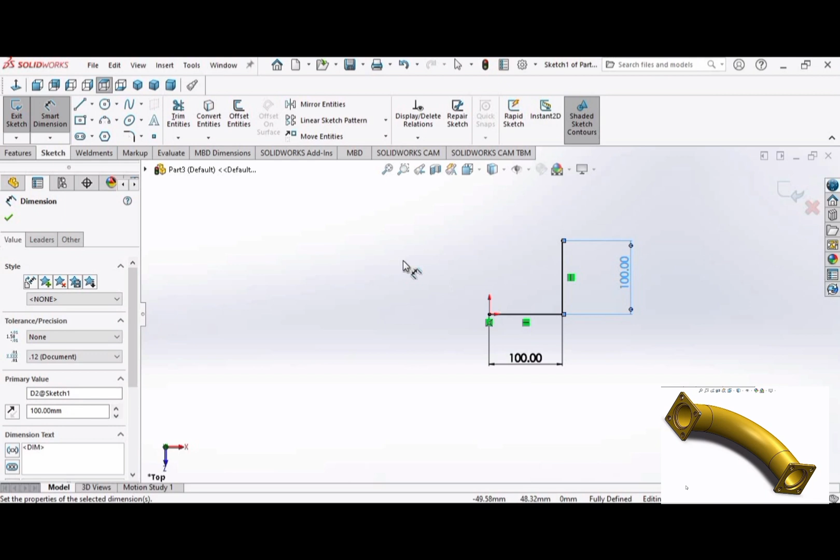Select part and click OK. Select line and make a horizontal line and a vertical line like this. Then go to smart dimension. Make this dimension as 100 millimeter and then make this dimension as 100 millimeter also. Then select the fillet, select these two lines, and then adjust this fillet as 70.

Perfect. Exit the sketch and select plane. Select this line and select this point.

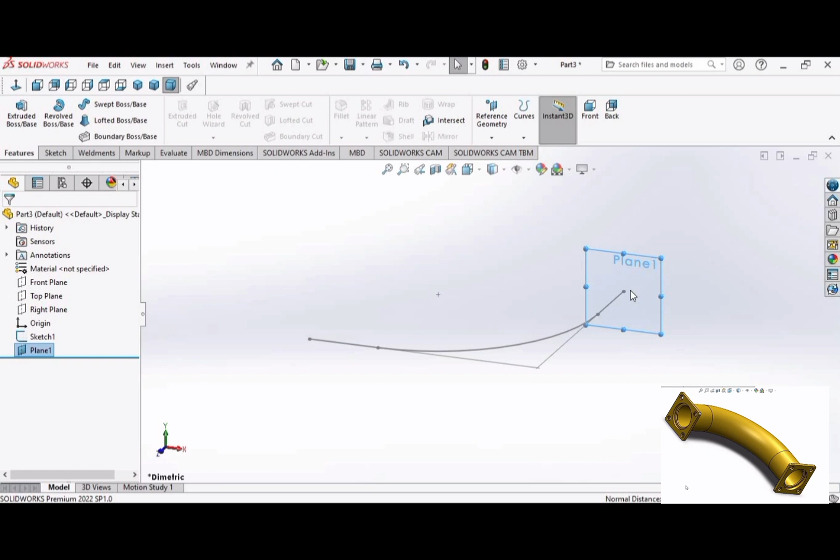Now create a circle at the plane like this and make dimension as 30 millimeter.

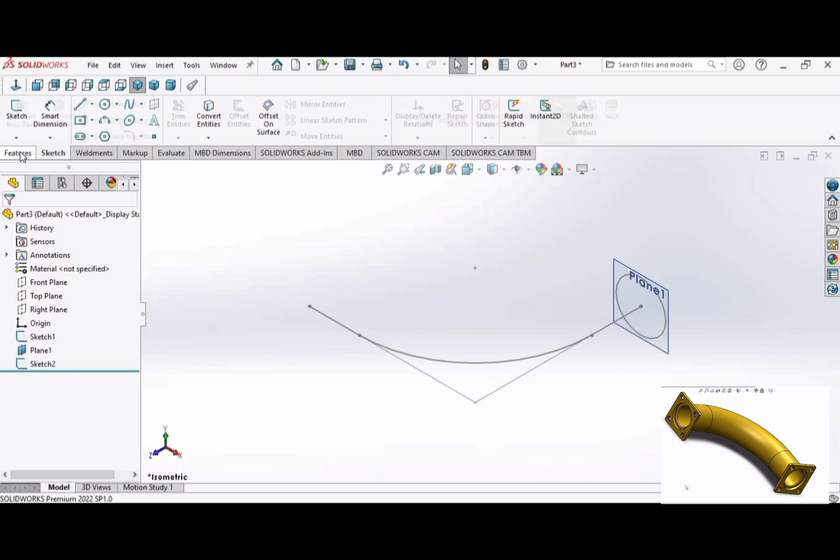Now go to the features and select Swept Boss command. Here we have Swept Boss. At first select this circle, and then select the line, this line.

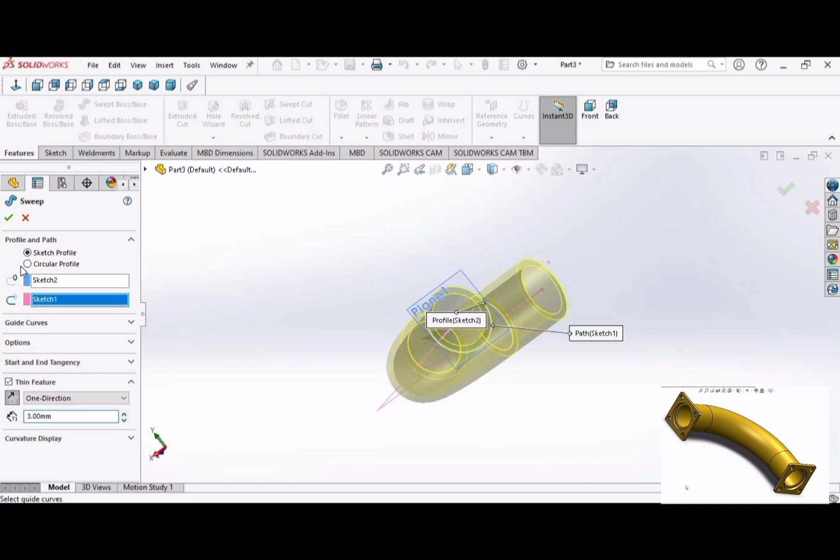Now select the thin features, select this option and make the thickness as 3 millimeter. Now hide this plane.

Select this surface and sketch. Make a rectangle like this. Dimension as 40 millimeter each side.

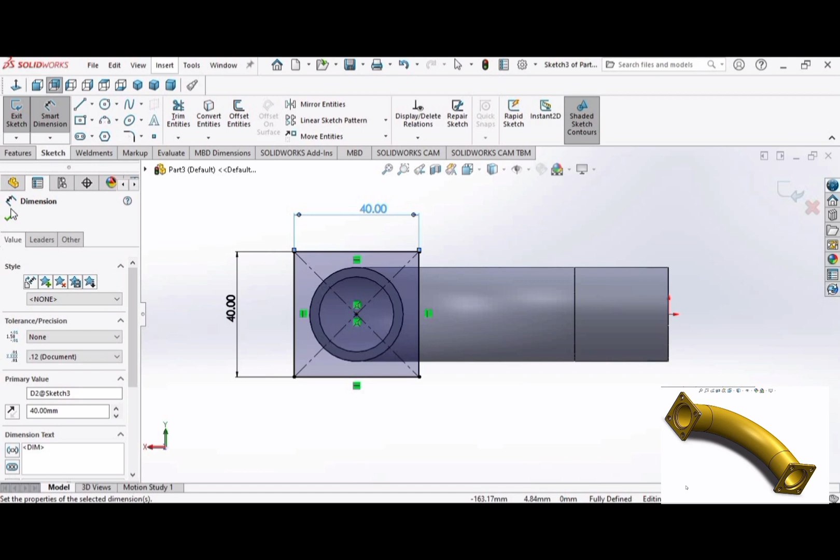Now select extruded boss command. 3 millimeter thickness is enough. And select this contour, select this outer surface. Click OK.

Now it's time to fillet the corners. Select fillet command, 2 millimeter is enough. In this blue areas, click here and then select this corner and click this option. It will automatically select all the edges. These all the edges are selected. Click OK.

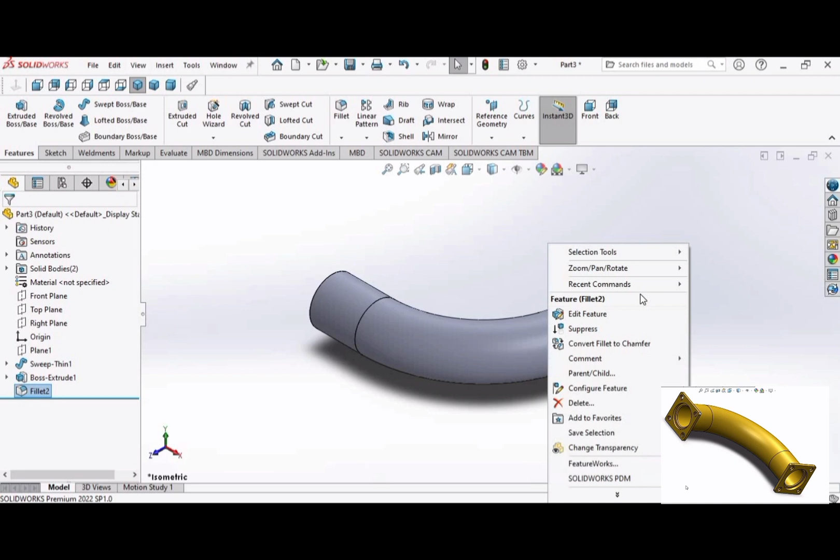Let me show you. You can see fillet is applied on all the edges.

You can change the appearance of the part. I am applying this color.

Now we will sketch the other side of the pipe elbow just like we have done on the other side. Make a rectangle, 40 millimeter each side.

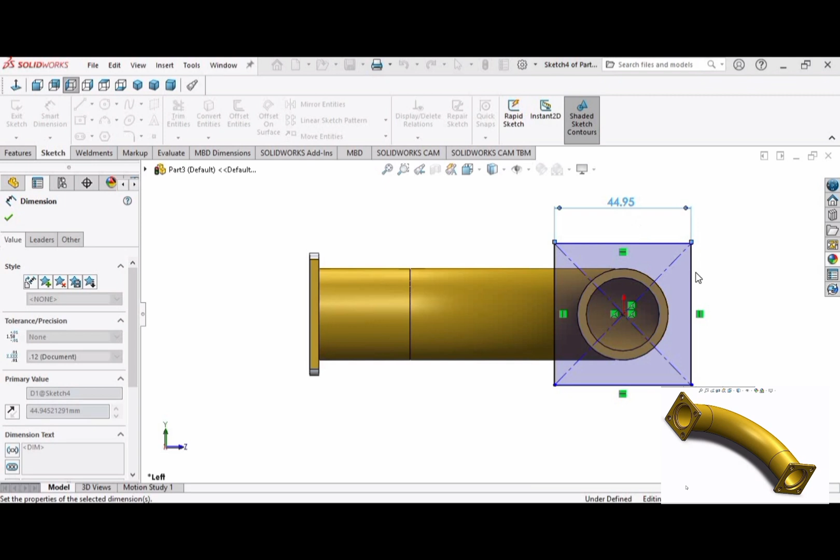Then select extruded boss, 3 mm thickness, and select this outer contour. Click OK.

Then make fillet just like we have done earlier. Select this and select this option. Click OK.

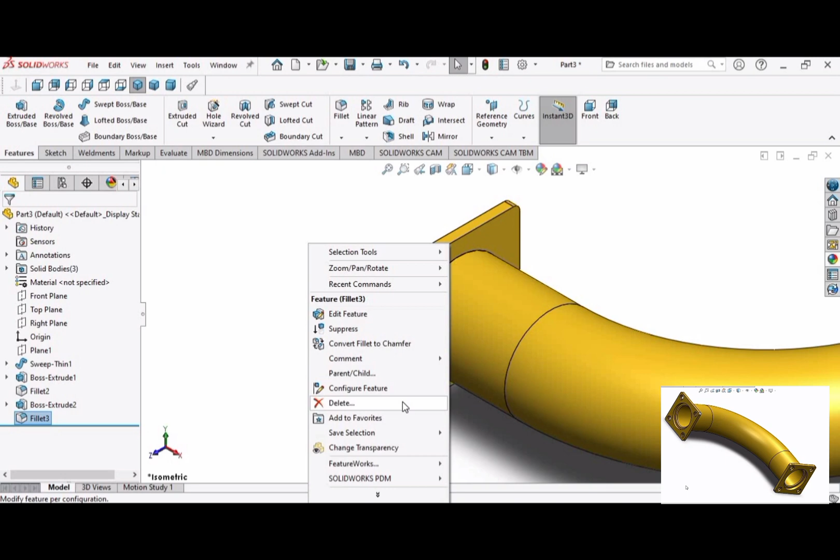Now we will fillet this inner surface, and then similarly fillet the other side of the elbow as well, the inner surface only. Click OK.

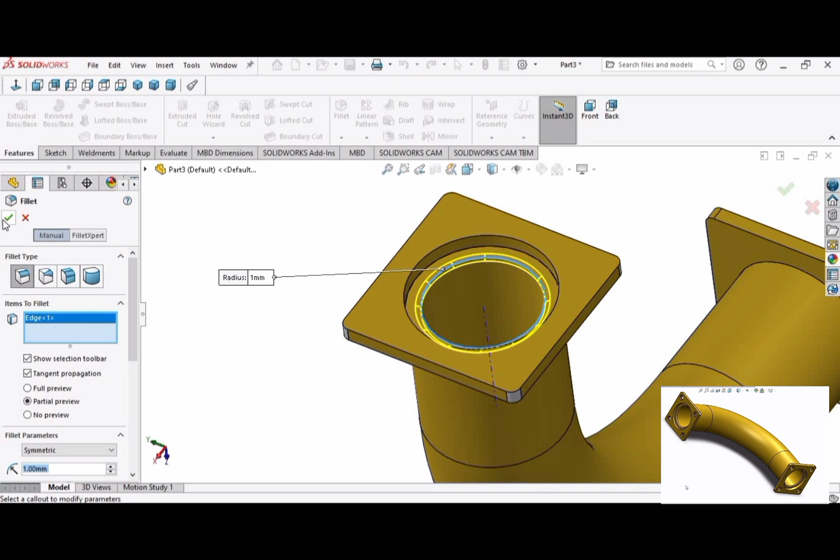Now it's time to create holes for the flange. Make a rectangle like this and select this option. 30 mm each side. Make a circle like this. Click on smart dimension and make dimension as 6 mm.

We will extrude cut this. Go to the features. Extrude cut, 1.5 mm is enough. Click OK.

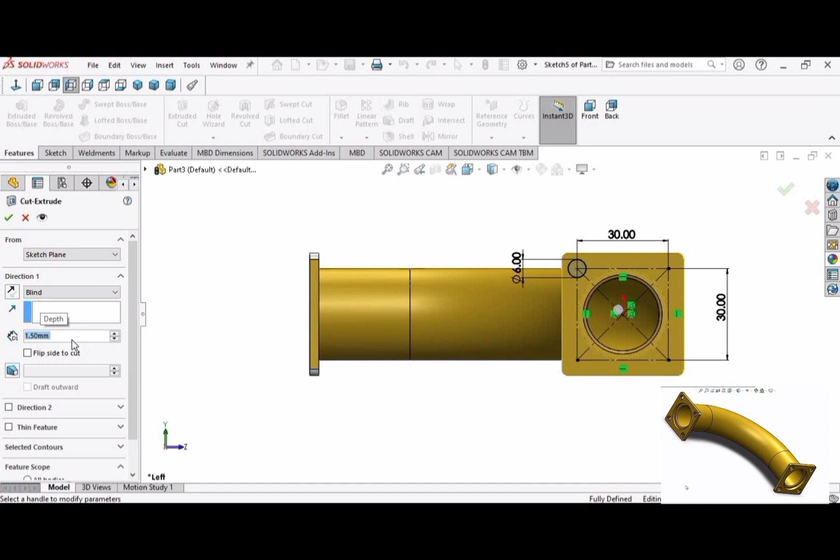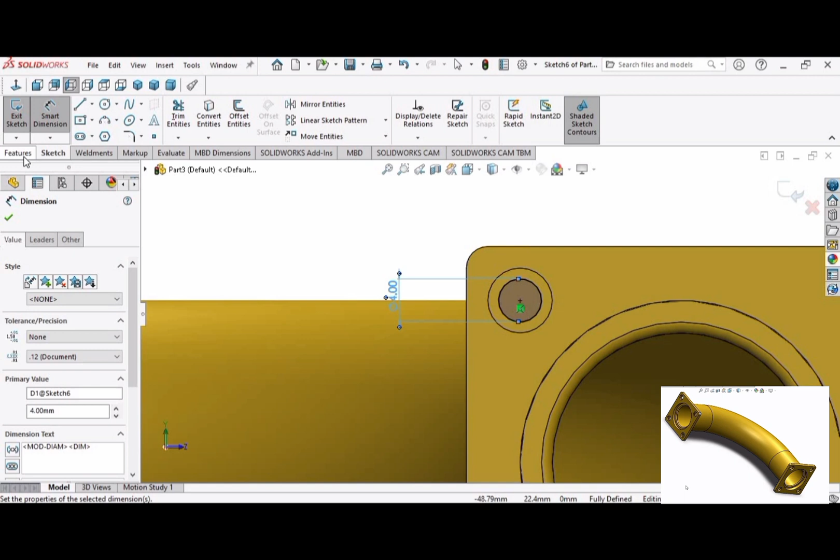Now we will create another circle in this circle. Sketch, make a circle, and this time we will make a circle of 4 millimeter. Go to smart dimension, select this circle and make dimension as 4, and now select extrude cut, 3 mm.

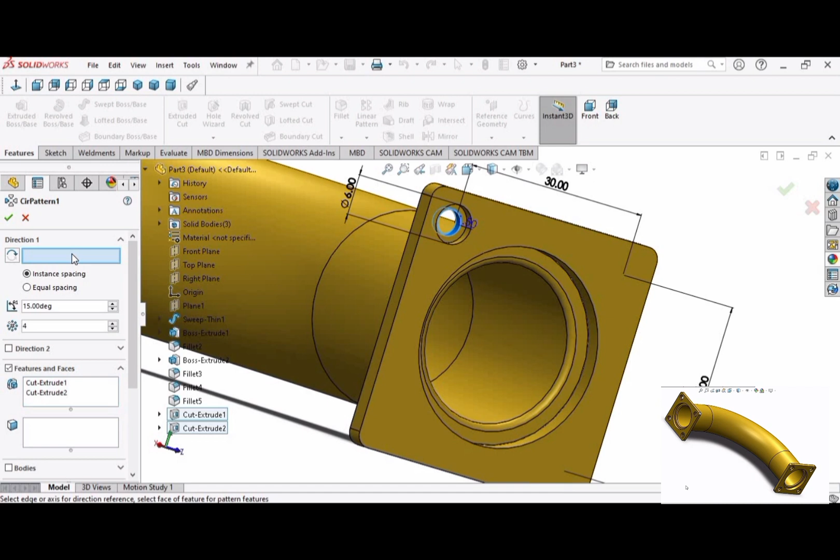Okay, we have created one hole and we need 4 holes. We will use circular pattern command. Click here on feature and faces, and then we need to select this hole. Expand this bar and select these two options. For direction, we will choose this. Here select 90 degree, and here we have 4 holes. Click OK.

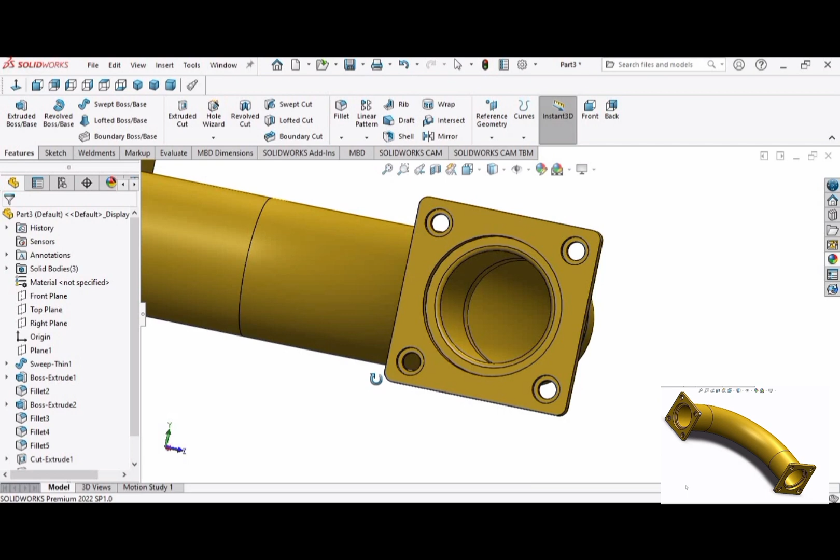Now we will make similar holes on the other side, just as we have created on this face. Sketch, make a rectangle like this, 30 mm, 30 mm. Do the same thing just as we have done previously.

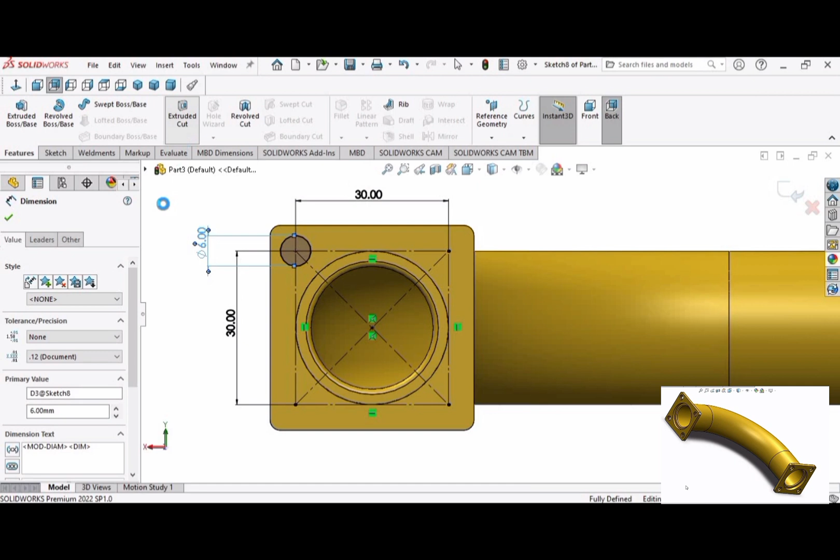And now use circular pattern command to make 4 holes.